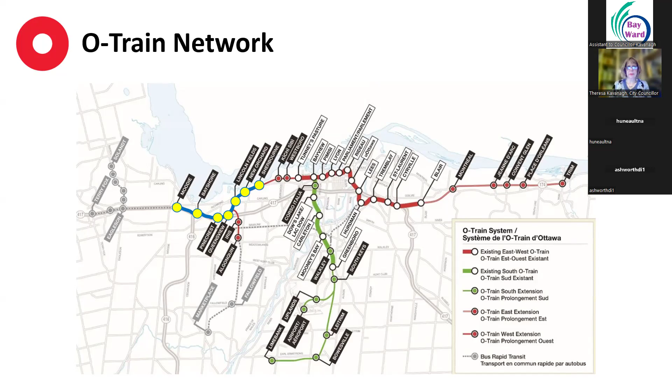Our agenda for this evening: we're going to go through a Ward 7 construction update, with new photos and update notes regarding station construction. We'll touch on the Highway 417 westbound on-ramp closure at Pinecrest, the 75 Cleary Deep Utility Works, Kichi Zibi Mikan work, the Richmond Cut and Cover Tunnel, as well as the Richmond Complete Streets project. At the end, we'll also have a slide with that contact email again.

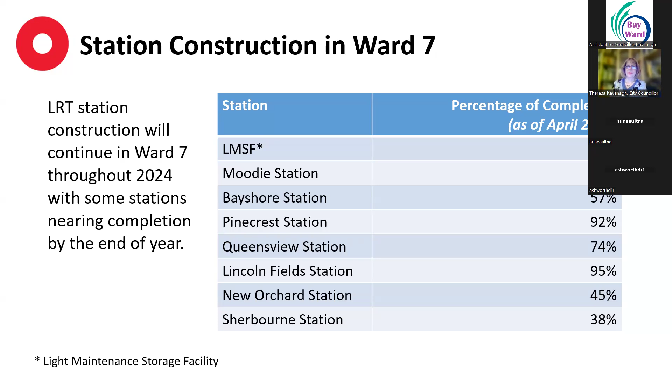Right now, our LRT station construction will continue in Ward 7 throughout 2024, with some stations nearing completion by the end of the year, which is very exciting. The light maintenance and storage facility is about 99% complete. Moodie Station is at 86%, Bayshore at 57%, Pinecrest at 92%, Queensview Station 74%, Lincoln Fields 95%, New Orchard Station at 45%, and Sherbourne Station at 38%. So we're coming to completion on a few of those stations. I'm sure all of you living around the areas have been able to see that work taking place and coming to a close.

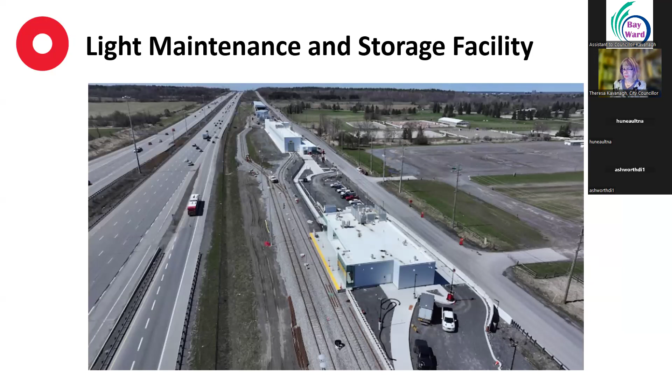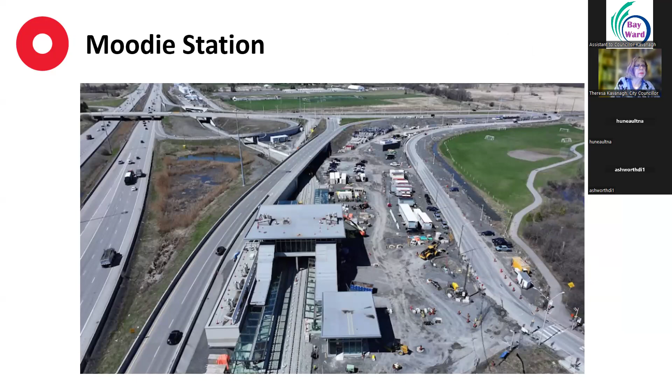For our light maintenance and storage facility, testing and commissioning of the building at the LMSF is in progress. For Moodie Station, the mechanical and electrical finishes, room finishes, elevator installation, concourse and ceiling installation is still ongoing, but there's definitely been some great progress.

For Bayshore Station, we have construction of the foundation wall at the center station building, concrete foundation work at the South Station building is currently ongoing. Framing and insulation installation for the northeast concourse rooms is nearing completion, and work on the pedestrian tunnel continues.

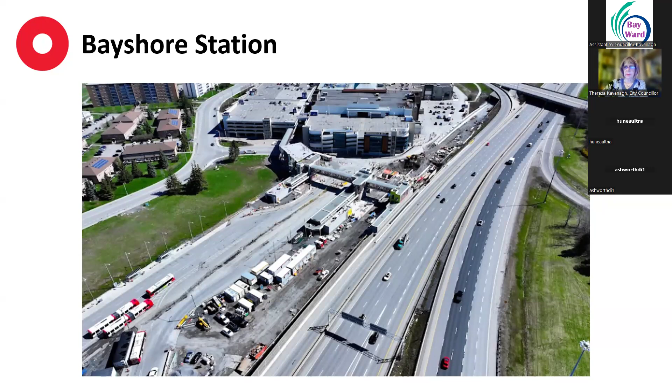For Pinecrest Station, the elevator shroud installation is taking place, signage installation, service riser installation, and as well as mechanical and electrical finishing work is ongoing.

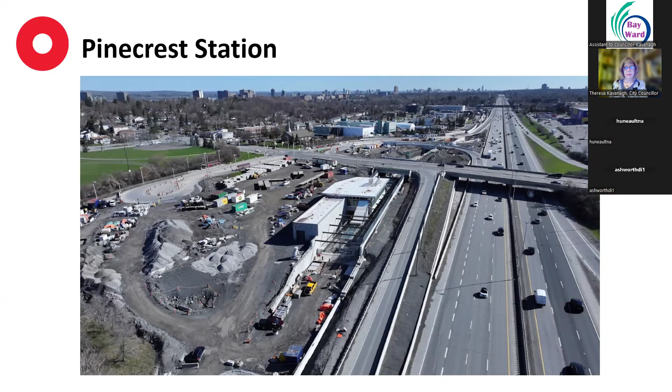At Queensview Station, installation of insulation and drywall at the Queensview Station North building, along with construction of the exterior walls continue. The concourse glazing is ongoing, and curtain wall support installation and mechanical and electrical finishes for Queensview Pedestrian Bridge is continuing.

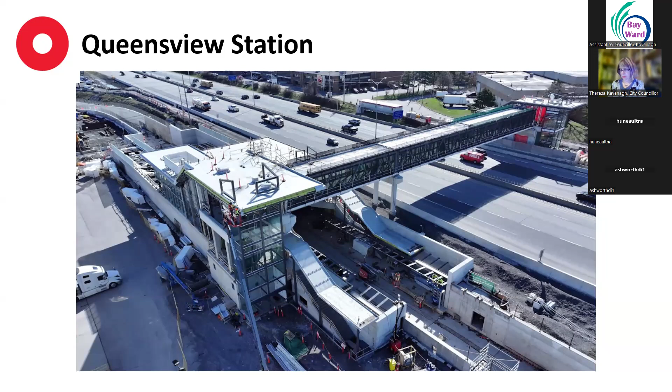At Lincoln Fields Station, interior finishes at the platform level and signage installation continue. Electrical panel installation along with installation of handrails at the end of the platform stairwell is complete.

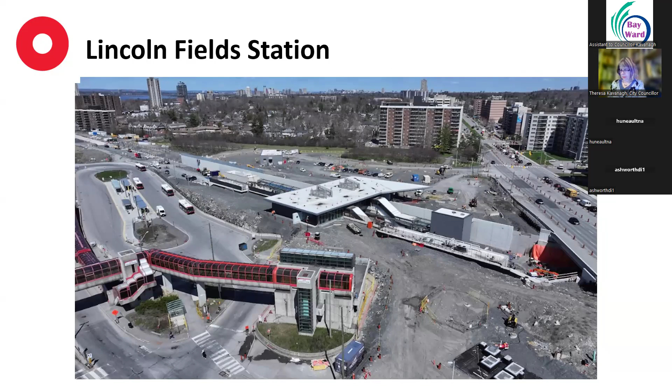For New Orchard Station, we have structural steel erection for the East Concourse, which is complete, and is underway for the West Concourse. And work on the West Concourse roof has started.

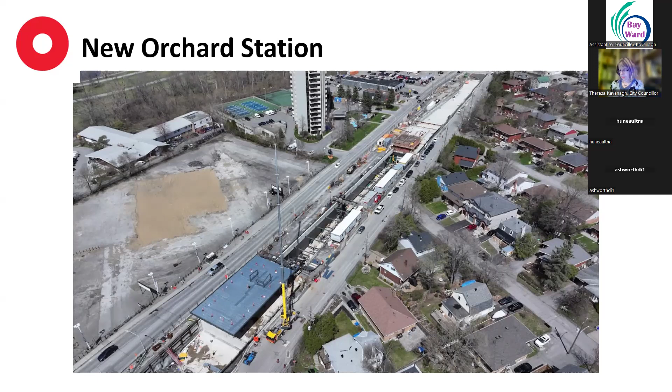For Sherbourne Station, concrete work for the West Station and East Station platform walls is now complete, and work on the stairwells and concourse slabs continue.

Just to make note, for all the photos presented, those were taken in April of 2024. So they are a fairly recent look at work that is ongoing and the status of the stations. However, reminding that it is May, some work might be a little bit more complete than when these photos were taken.

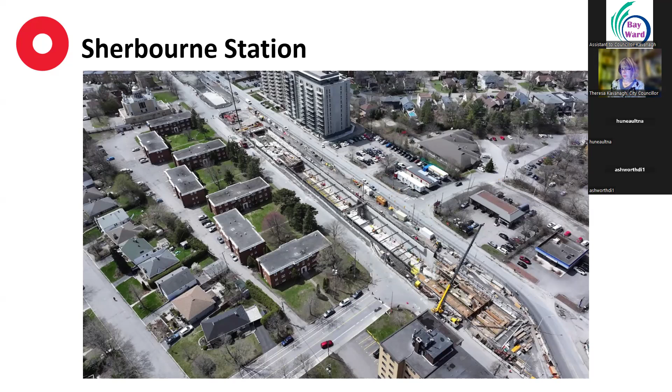So now we're going to touch on the Highway 417 westbound on-ramp closure at Pinecrest. To complete construction of the permanent roadworks and the segment of the LRT guideway at Pinecrest Road, the westbound Highway 417 on-ramp from northbound Pinecrest Road, which closed on Monday, May 13th, is expected to reopen in early August. Once completed, the northwest ramp may be closed temporarily, and a public notice will be distributed in advance of that temporary closure.

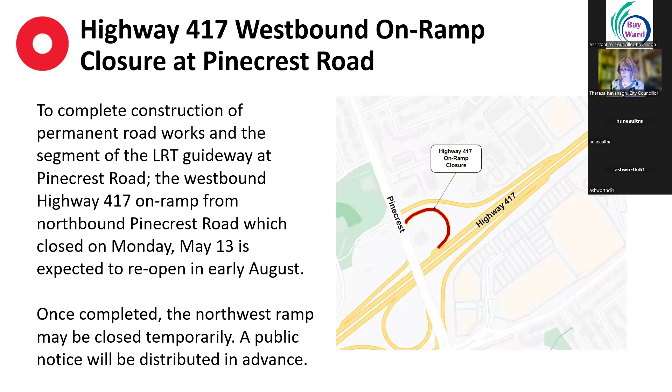For 75 Cleary, the deep utility works, May to fall 2024, utility work to the east of 75 Cleary Avenue involving deep excavation, replacement of water main, storm and sanitary sewer infrastructure will take place. And as early as October 2024, the temporary detour through the old Kristy's Restaurant parking lot will permanently close. Just to note in the picture, the highlighted box does show the area requiring those deep utility works.

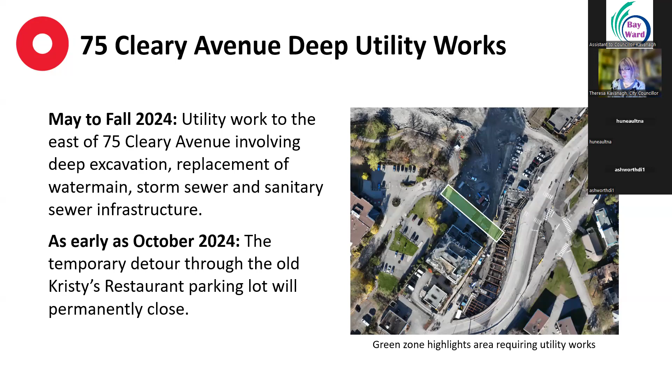The Kichi Zìbì Mìkan, so May and June, there will be backfilling of the tunnel along the KZM. For 2024 and 2025, construction of the permanent configuration of the KZM will be taking place. And this summer, 2024, construction of the Cleary pedestrian underpass will be continuing.

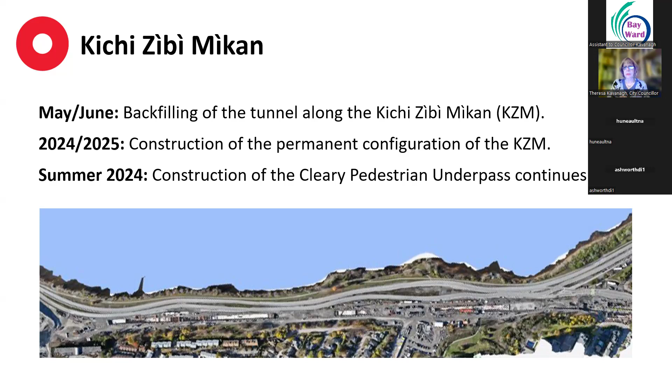For the Richmond Byron cut and cover tunnel, we're looking ahead to June 2024, which is shockingly only in a few days. Tunnel construction along Richmond and Byron will near completion, and once completed, tunnel backfilling will commence.

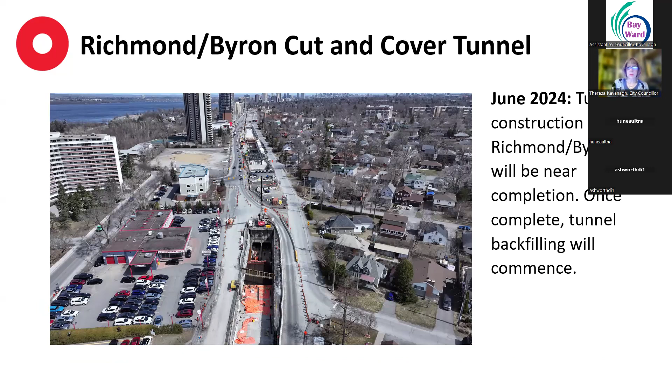Touching on the Richmond Road Complete Streets project, preliminary work is expected to begin this year between the east side of the bridge over the KZM and just west of Cleary Avenue. The multi-year project will involve backfilling of the LRT tunnel in the area, final paving of Richmond Road and Byron Avenue, construction of curbs, sidewalks, bus platforms, and shelters, raised pedestrian crossings, segregated bike lanes, installation of street lighting, traffic signals and signage, tree planting, landscaping, and property reinstatement.

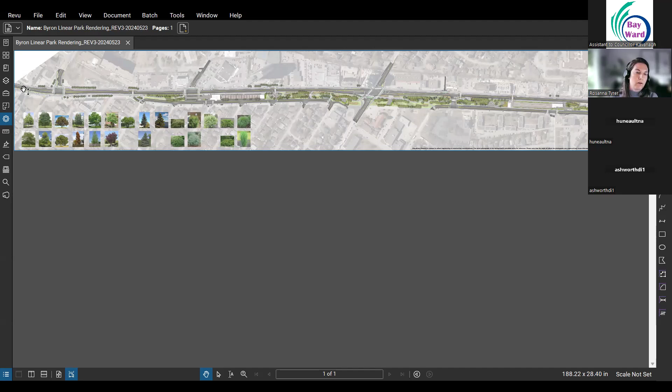So I'm going to go from left to right. It starts right at the Richmond Bridge, just where the bridge goes over the Kitchissippi, all the way east, just past Cleary, so in front of 797 Richmond.

I will be providing this roll plan to the councillors to share so that you can peruse at your leisure. So if I do go quickly and there's something more that you want to check out, you can do so. We are also going to be looking at putting together another web page and notification sign-up group specific for the Richmond Road Complete Streets, just to make sure that no one is missed, especially for those individuals who are looking just to get information on this part of the project.

So what you'll also see here is that we do have some trees and shrubs to the side. We're not going to specifically identify each and every little tree and which is where, but we did want to give an indication of the type of species that went in this area.

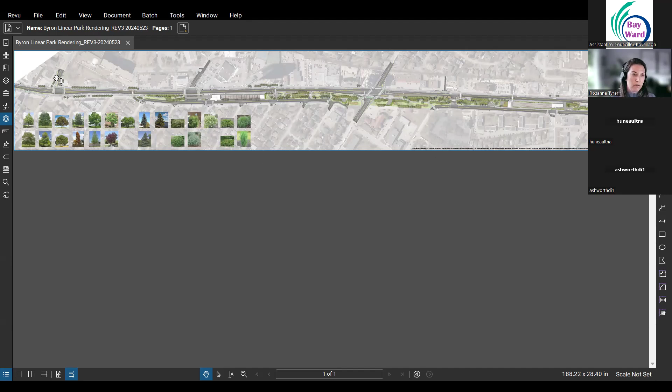In addition, you can't really see it on my screen, but there is a little disclaimer. I will note that this is overlaid on an aerial. The way in which aerials are taken, sometimes they're taken from above, so you may notice things, for example here, where it looks like a driveway doesn't quite line up with the existing driveway. I can assure you that this driveway will, on site, line up with the proper site. So just keep that in mind when you're looking at whether or not some of these edges line up exactly with what you see underneath. It's more or less just to help reference where everybody is.

So to start, I'm going to start backwards. Essentially, I'm going to go west to east. Throughout the entire corridor, we're going to have separated cycle facilities and sidewalks. If I zoom right in here, you can see the sidewalks are denoted with this gray-like hatching, whereas the cycle facilities are between the road and the sidewalks, denoted by the cycling nomenclature pavement markings.

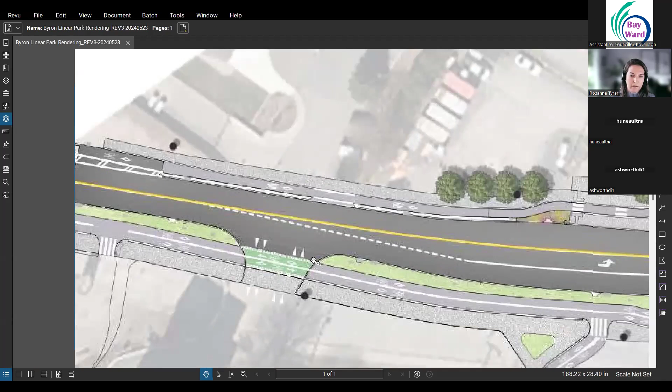Right here, we will have the access to the Lincoln Fields area, the MUP that goes into there. We have our 1190 friends with their new aligned access, as well as the 1195 on the top - their access will be reinstated to Richmond Road. You can see here, we get to Edgeworth. Edgeworth will remain closed and have a tie-in for both pedestrian and cycling facilities.

At McEwen itself, the final alignment will be pretty much in between where it was a few weeks ago and where it is now. So we are in the process of getting all the underground infrastructure in for that. And the cycling and pedestrian facilities will tie into the existing, as well as the cycle facilities will have an on and off road transition between McEwen.

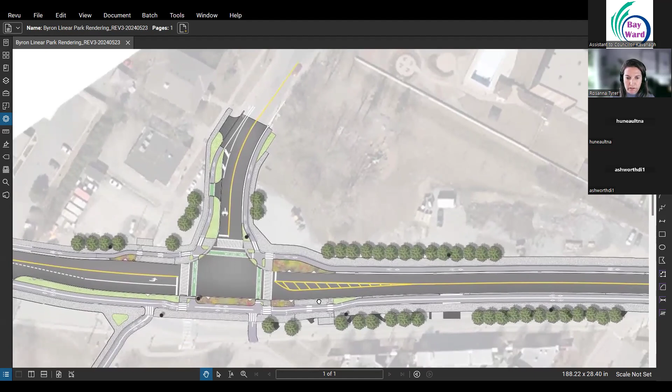So at the intersection, you can see that the cycling facilities will have its own dedicated crossing, as well as the pedestrians. We will be having bus stops with bus pads at various locations throughout this project. For this particular intersection, you'll have one on the far side on the northwest corner, and then one on the southeast corner for the opposite direction.

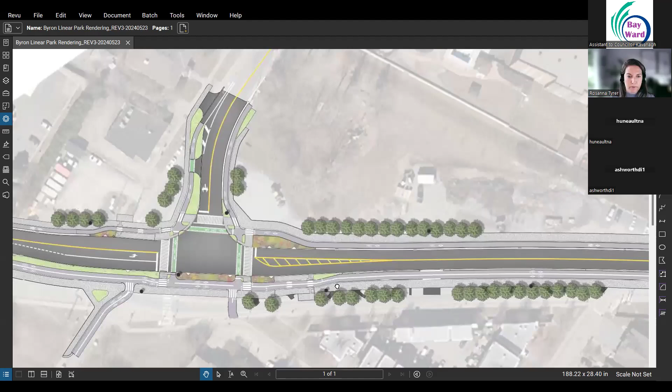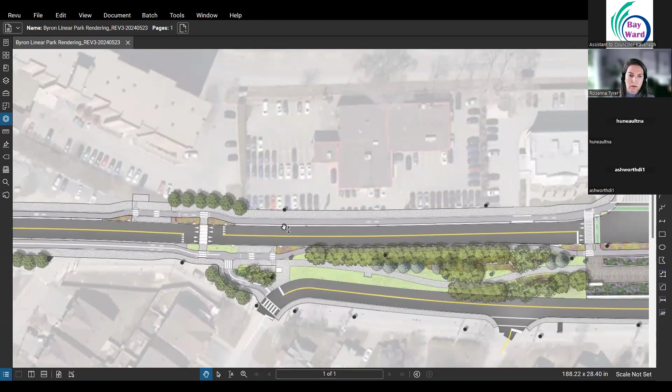As you can see through this area, we have some driveways and the tree reinstatement along the way. Once we get past the Ambleside apartment complex and the used car dealership, there will be a raised pedestrian crossing, which we've had in the past.

I want to bring attention to these, we call them shark teeth. These little triangular pavement markings denote a raised crossing. You'll see that at a few of the intersections as well as some of the raised crossings through here, so at Hartley the crossing will be raised.

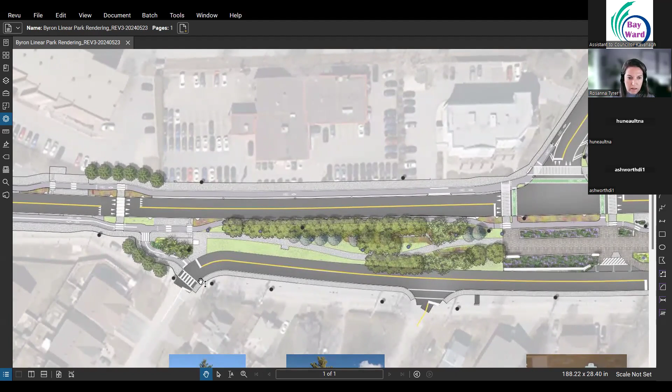The other big change to this area is that the connection from Richmond to Richardson is being removed. There will be facilities to take people to Richardson Byron to get them down onto that road. Otherwise, they can continue on through to the station.

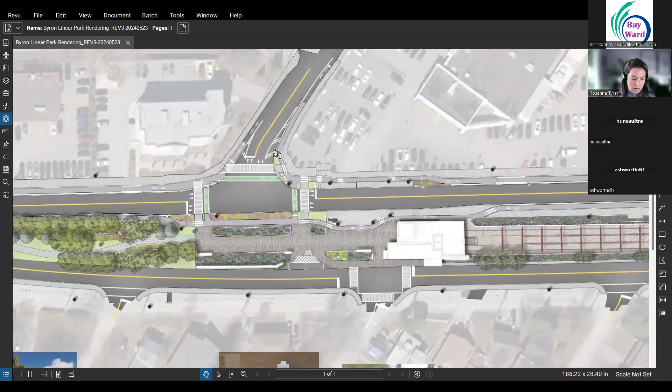So this intersection is the New Orchard intersection along with New Orchard Station. We will be reinstating the road up New Orchard. We'll be doing the same form of treatment, much like McEwen, where the sidewalks will be attached and the cycling facilities will have the on and off street transitions.

It will also have the same treatments for crossings. The one thing I'll note, once again we have the shark teeth at this intersection, that's because New Orchard Station will be raised. So this whole intersection, when you come to it, will have you go up and over. It will also be a paver stone intersection, so that between the raised element and the different material, it will have a traffic calming effect.

On the south leg of this intersection is where the courtyard for the station begins. There'll be some on-street bus facilities to capture the local residents coming in and out of the station. There'll be all-way stop and some one-way stops along Byron as we go past the station, and on the north side you have your pedestrian and cycling facilities to carry on past.

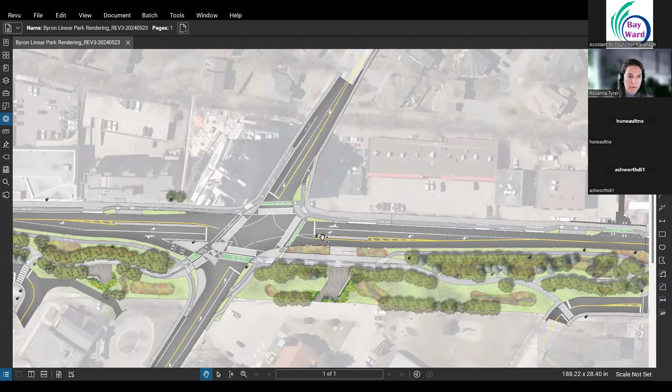Moving further to the east, we move into the Lockhart transition. Similar to both Richardson and Richmond, and Richardson and Byron and Compton, they will turn down with a pedestrian connection through it.

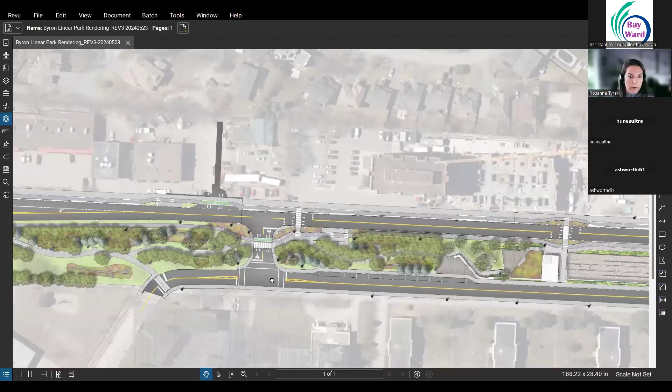We are now here. This is the northern section of Lockhart with the Poolorama. There'll be a bus stop here as well on the other side with, again, another raised crossing. And the crossings between Byron and Richmond will also be raised.

As you move further east, this is when we start to get into the Sherbourne station. As you can see on either side, it has pavilions and facilities for bikes and pedestrians to move across it on the north side, as well as some amenities on the south. So again, we have the controlled crossings on Byron.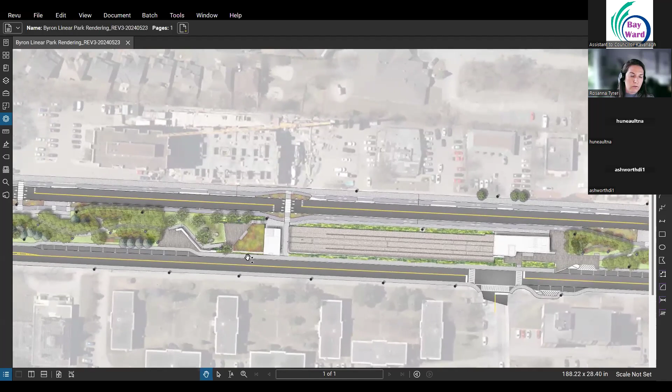Sherbourne does have the small PUDO, or kiss and ride, on either side. These are not anticipated to have high volumes. This would be more or less you and your neighbors dropping off your loved ones on a rainy day kind of scenario, or picking up.

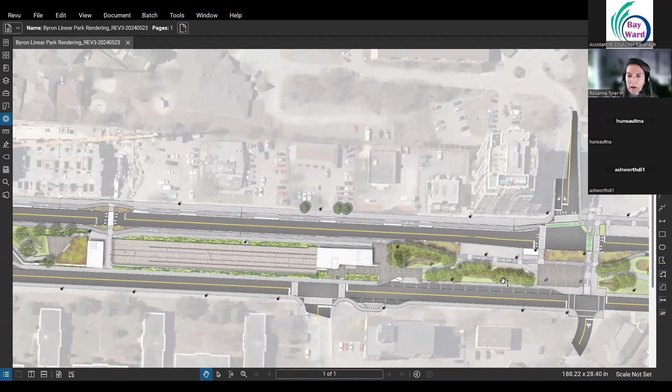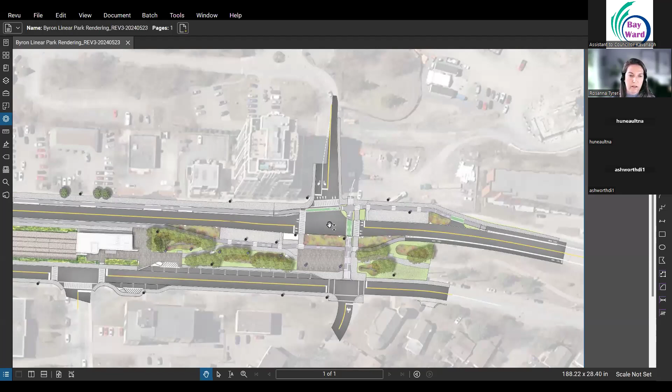So the last leg of this plan is the Cleary intersection. Again, Cleary intersection will be just like New Orchard, where it is raised, as you can see by the shark teeth. It will also have the Paverstone intersection, which will again add to the calming effect from the visual and vertical changes in the area.

We also have, again, segregated crossings for the different modes of transportation, and your two bus stops on either side. And then it'll continue on and tie into the existing street.

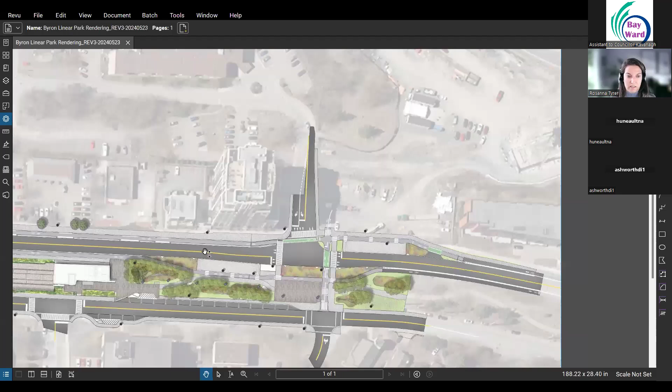So I know that's a lot to digest, and these are very small pictures for now. They will be released so that everybody can take a moment to check the areas of more particular importance to them. If you see something, please send us an email through Stage 2. If you can use a clip or good directions on exactly what you're looking at, that'll help a long way. Otherwise, I'm always welcoming one-on-one video chats where I can sit and walk you through in a smaller group.

With that, I had the chat hidden, so I'm not sure what has popped up. Where did we go?

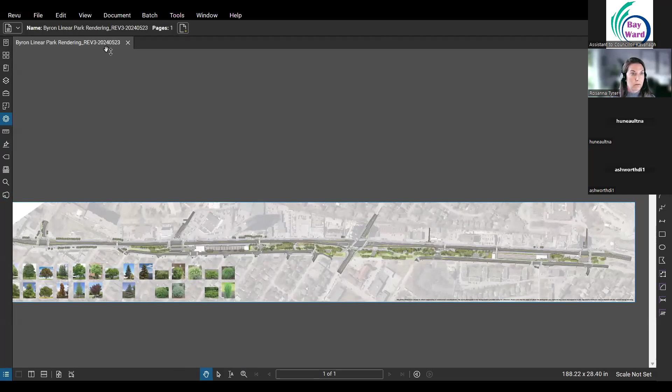Thanks, Rosanna. Yeah, it's a ton of stuff, but all very exciting. And I can tell you, I rode my bike home along that way, and I will look forward to having a separate cycle lane so that it's safe for everyone. Cars have their lane, cycles have their lane, pedestrians will have their space. So it's good stuff. Great.